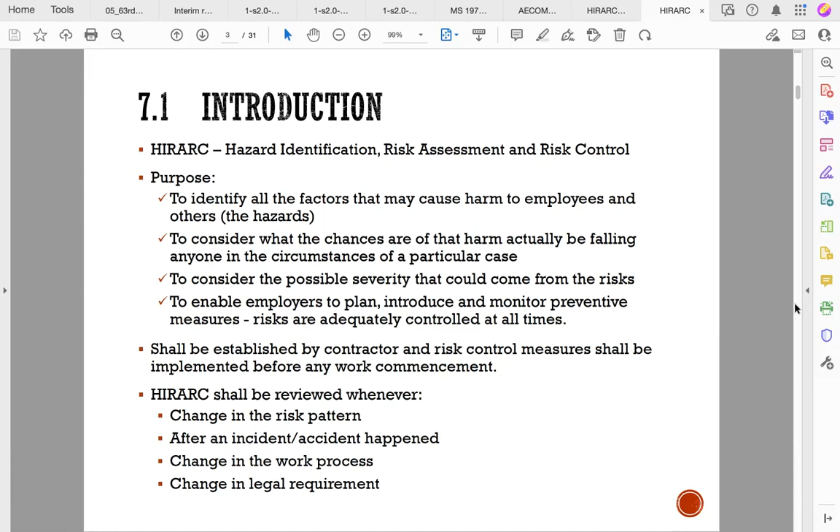So this is the one you just mentioned, about hazard classification. They have the physical hazard - what is the physical hazard here? Hazard that can cause harm. For example, what is physical, biological, chemical, ergonomic? Any kind of hazard related to this classification can harm these three things: human, environment, and property, which is considered a hazard. Other than that, there's psychological, workplace, electrical, and mechanical.

Let me show you the classification in details. I think this one is clear to show you. Let me share this one. Can everyone see it?

Hello? I'm worried if it's not changing to the right one. Sources of hazard, Doctor. Sources. Yes, correct. So I want to give you an understanding of what is the hazard based on this classification.

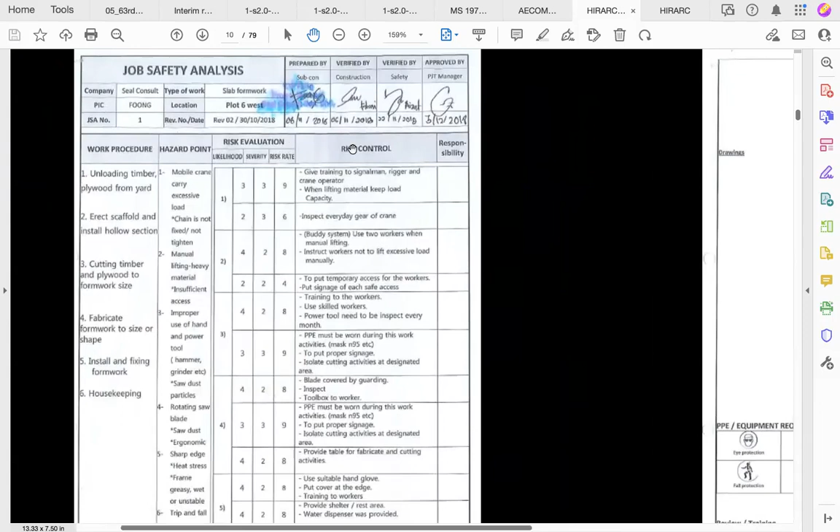Okay, and these are examples that they are doing. If you look here, they already identified the hazard. Can you see it? Hold on. Okay, can you see it? So here they say hazard, and then risk evaluation, and then risk control. So these are examples from UEM construction.

Doctor, why is the form title job safety analysis? Okay, like I said, it depends on the practice of the project. Some notify this as JSA, and they also have the method statement, safety method statement, method procedure and so on. But actually this job safety analysis, of course you have to analyze the work because it's related to the work activity.

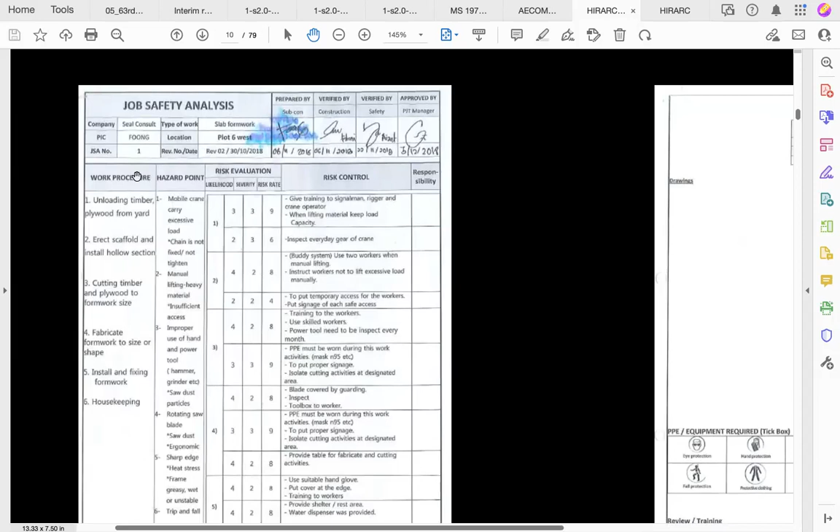So whatever job is conducted at the construction site, you must identify the risk. That's why they consider this also part of the JSA. It depends on the company, they call the HIRARC to be conducted under JSA. And some companies, as long as they do this analysis, which is already done as part of their job, at least they do the preventive control, preventive measure already.

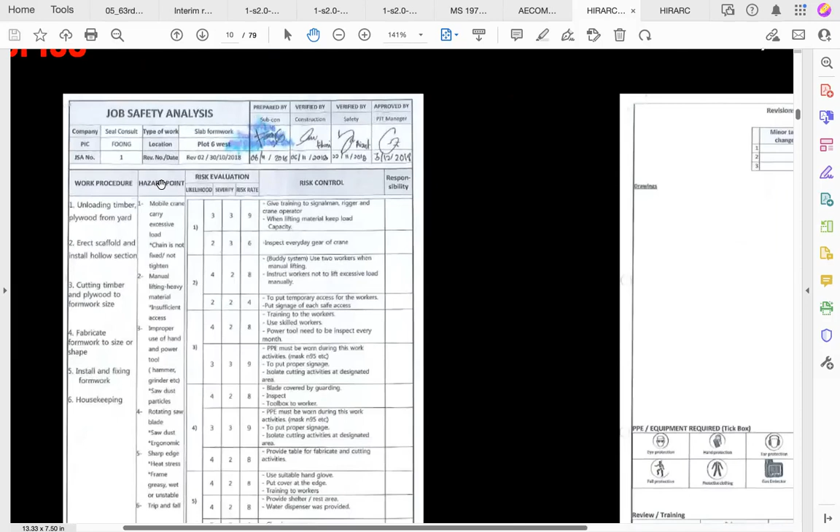Before they start the work, when they call it JSA, of course they can use this term because the activity you do to analyze is to identify the risk, to evaluate the risk analysis and so on. It's clear, okay. And this is also a common practice. Every construction project says, okay, can you do the JSA? Usually the content of JSA comes up with the HIRARC.

And then they have a working permit. Have you heard about the permit to work? PW, POW, or PTW, permit to work? So PTW, have you heard about it? When do you use the PTW, permit to work? Before I start the work.

Okay, now it's already JSA here. You said before you start the work you implement the PTW. Why aren't they calling this form a PTW? This one is also before the work. Why do they call it JSA? PTW, when do you want to use the PTW, permit to work?

There's another term you have to know. The reason is PW is more detailed for specific work, like we have PTW for excavation, for lifting. Why do they use this process? There's a reason when you want to use a PTW.

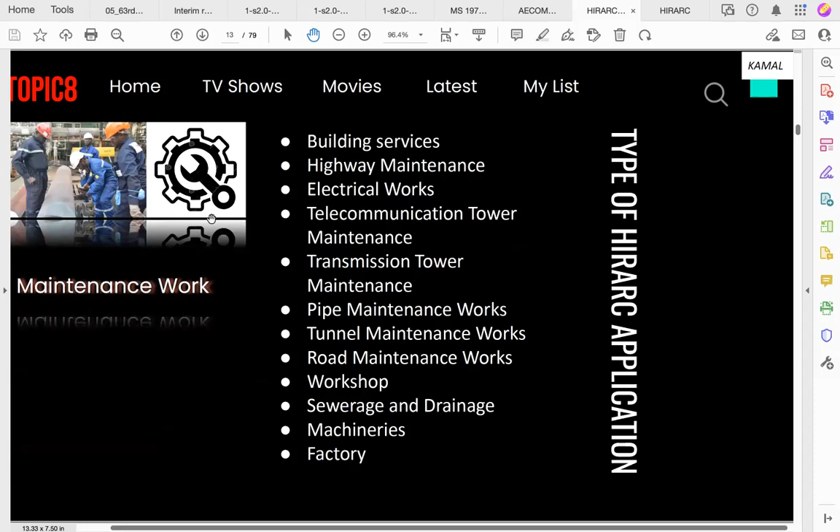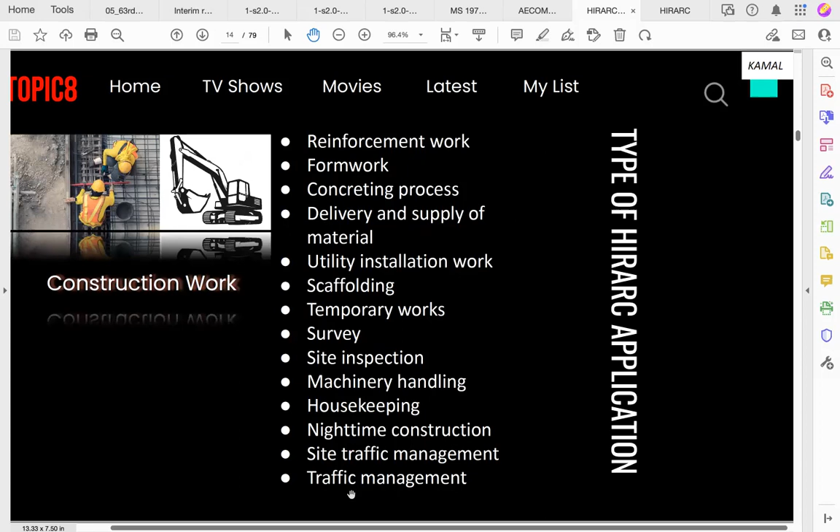Building service, highway maintenance, every activity - those who need to comply with OSHA need to do this HIRARC, and there are many works related to these activities. If it's construction works, you see how many works here? A lot, right? And there's more - oil and gas, depends on the industry. If it's landfill, this kind of work, they also have to do HIRARC.

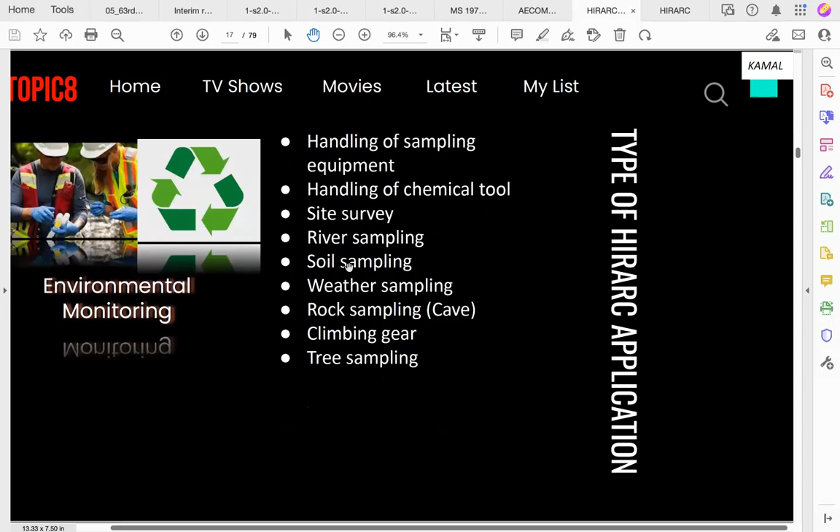Environmental monitoring, okay, all right, so they have the guideline you can see here for HIRARC. That's why we refer to HIRARC, because they also have the guideline, the common practice. So when they have this guideline, it means HIRARC is being practiced in many industries, those that comply with OSHA, not only the construction industry.

And again, like your friend said, it depends on the practice, so don't be stuck with just the term HIRARC, don't be surprised if you hear other terms. So this is why we need HIRARC - because it's part of the safety management.

And then there's the Construction Activity Risk Assessment, they call it CARA. They use their own terms as they like - so they have these terms as well.

So what happens is, under this practice, under this standard, they also say that they have to identify the hazard and analyze the associated risk, because it's in the act, in the regulation, in OSHA. So no matter what activities, especially CIDB - which is specific for the construction industry - they want to make sure that the performance of construction companies in Malaysia practices safety. So they have their own standard, coming up with the same things, whatever complies with the regulation.

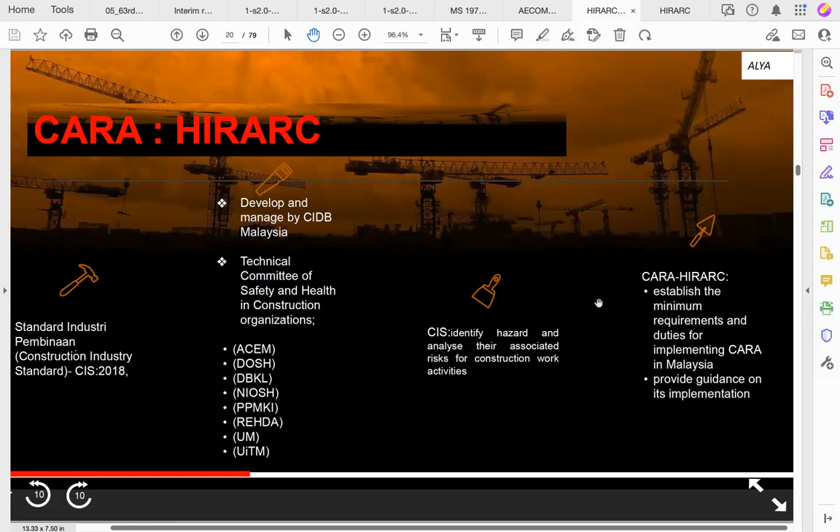So they ask them to do this as well - establish the minimum requirement duty for implementing CARA. This is under CIS, and then provide guidance on its implementation. So these are the activities under this standard dimension - these are the crucial or common practice activities at the site.

Okay, site preparation activities have sub activities that you might have to analyze and come up with the HIRARC. So they come up with these 9 main activities at the construction project, and you have to come up with this HIRARC.

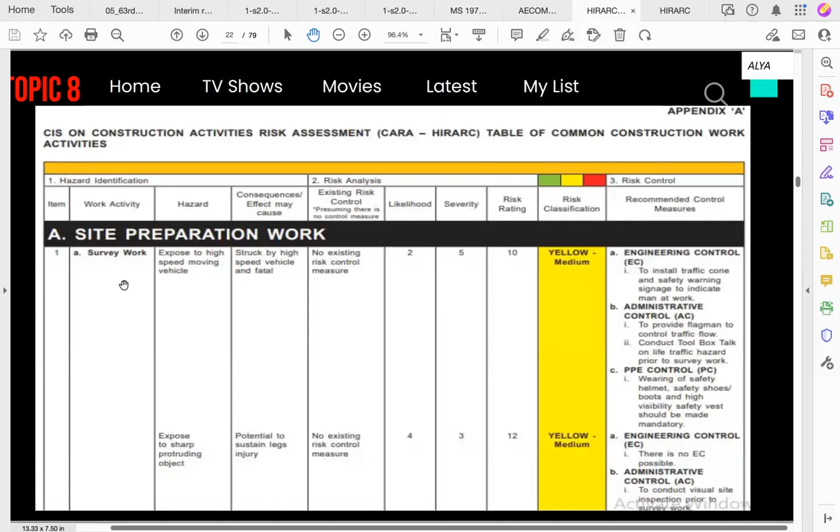These are examples of site preparation work. What do they have? Survey work. Is there any risk? If they say yellow, that means medium. And they have site access preparation. When they say high, why is site access preparation high risk? Maybe the site is at the hill, or at the ocean, or anywhere else. So it depends on the location wise. Some site access preparation maybe is not high risk, some yes.

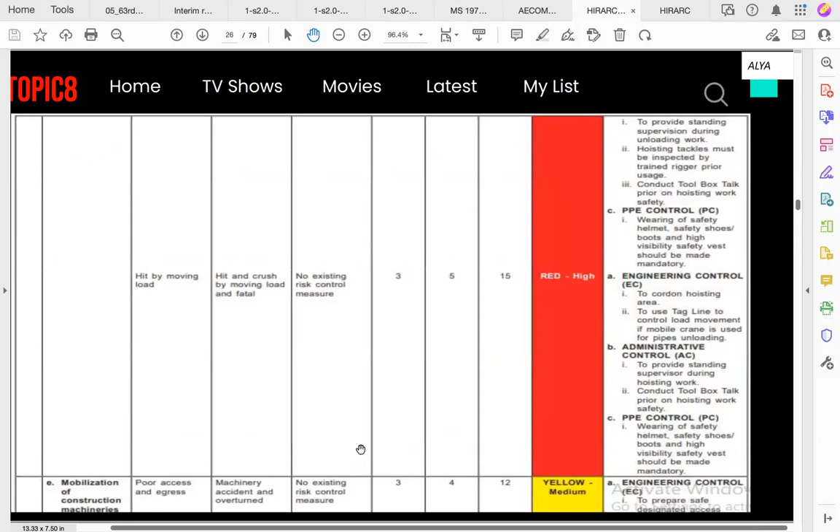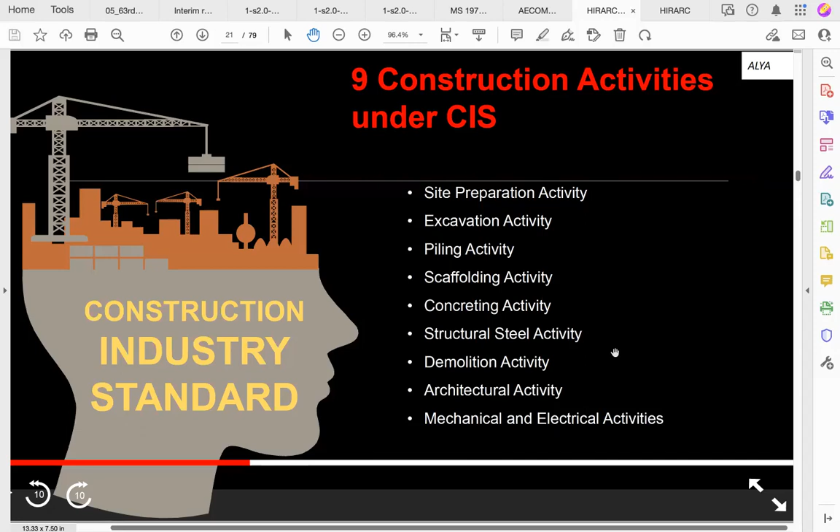Site clearing - so it depends on the project. The one you can refer to, for example, like these 9 activities here, the safety officer can get a reference for this one. They can copy this one, but the sub activities will differ, and the analysis might be different as well.

What time is now? I hope that by 9 I can brief you about the project. This is the purpose and objective of - I already mentioned this one, right?

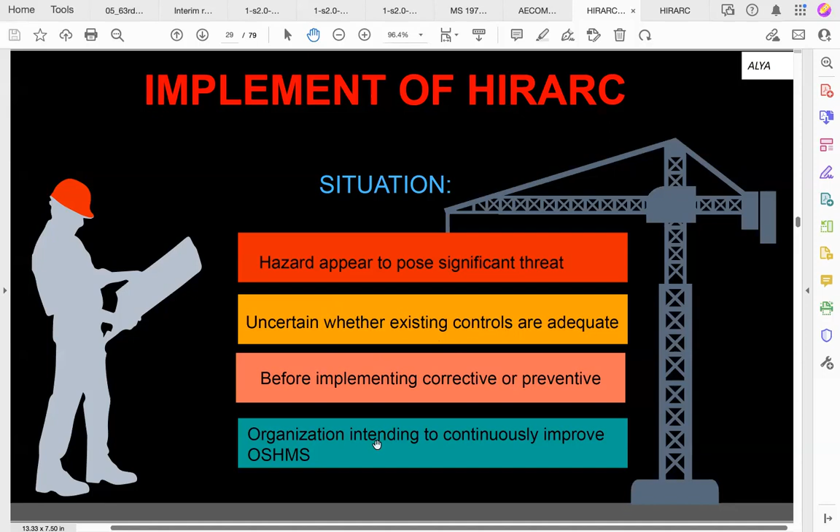The situation, you see, has it appeared to pose a significant threat? Uncertain whether existing controls are adequate, how to implement, and before implementing the corrective and preventive actions, the organization is intending to continuously improve.

So for the implementation, how to start, of course you need the employees' participation, because they are the ones who have to carry on the work. So no matter how, you have to deal with them. And then it depends on the specific organization policy, how much they want to consider as high risk, medium, and low, and how they want to calculate the risk analysis, the assessment.

And then they need to implement because of the external audit, but without external audit also you have to conduct it. And then management committee review report, internal audit, commitment of management, organization should have a vision, safety basic training. So this is how you want to start implementation, and then this is the HIRARC process.

So you can see, like I said, you must classify the work. In the standard from the CIDB, they already mentioned about the 9 activities. It could be more, it depends on the safety officer, how they want to evaluate and so on to do the HIRARC. So it could be more than 9 parts.

And then for this one, you have to identify risk analysis, implement, review. It's common - later I'll show how to calculate. Hazard identification - these types of hazards, there's more.

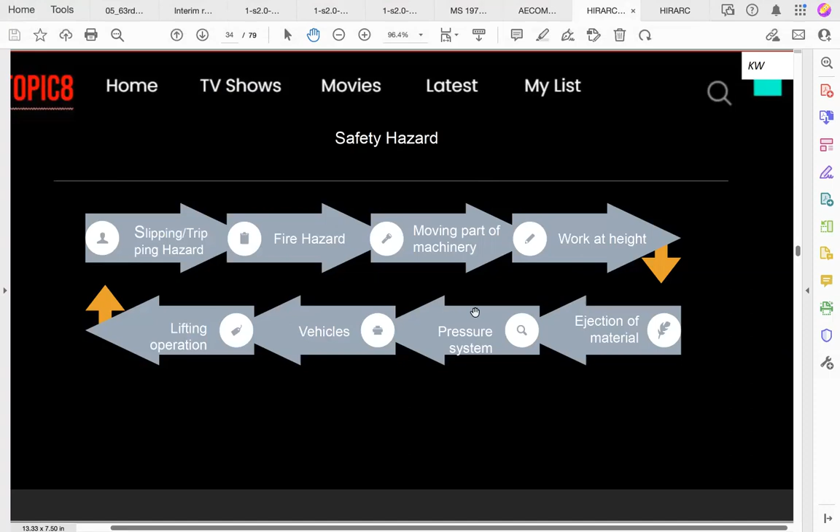This is a safety hazard, environmental hazard. Alright, how do you want to identify the hazard?

I gave you the slide, it's moving, right? Now it's about hazard identification technique. No? Yes, it's moving, Doctor.

So to identify the hazard, actually there is a technique. For example, if you are still new and want to identify the hazard, it's not easy for you. So you must base it on the record, complaints, health and safety documents.

Maybe reference and so on, the inspection, maybe from interviews with the workers themselves, from observation. So these are the techniques in order for you to identify the hazard. It's not simply by thinking - you must see it on site in real. Then you will see the technique.

Hello, can everyone hear it? Yes, can, can, Doctor. I don't know what happened, I heard some signal. Okay.

And then hazard identification assessment - the steps and time frame of identifying a hazard and keeping a record of the hazard, reviewing and monitoring. So this is what you have to do. And the technique, like I said just now, there are a few techniques. It doesn't matter, as long as you cover all the activities at the site, it will be fine.

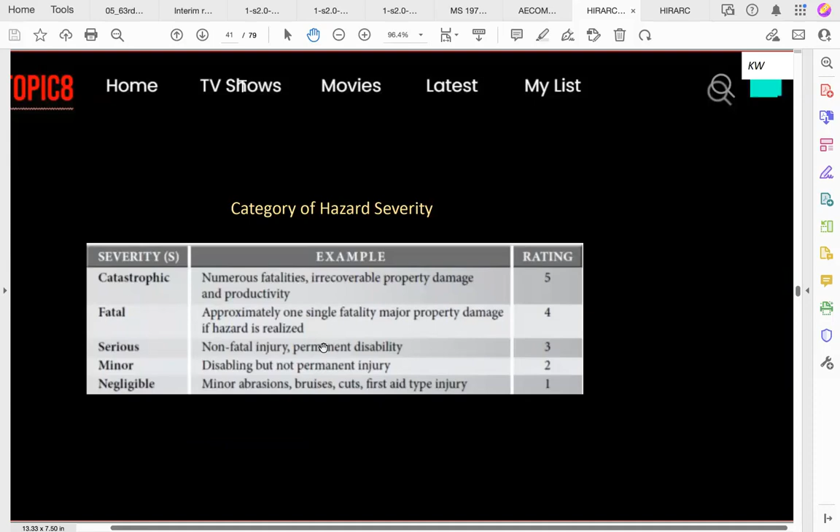So for the same thing, it depends on how you want to evaluate, it also depends on the condition. It could be 5 if the wire is, for example, in contact with water, so everyone can get in touch with it, so it can become a catastrophe. So it depends on how you want to evaluate, depends on the condition on that side.

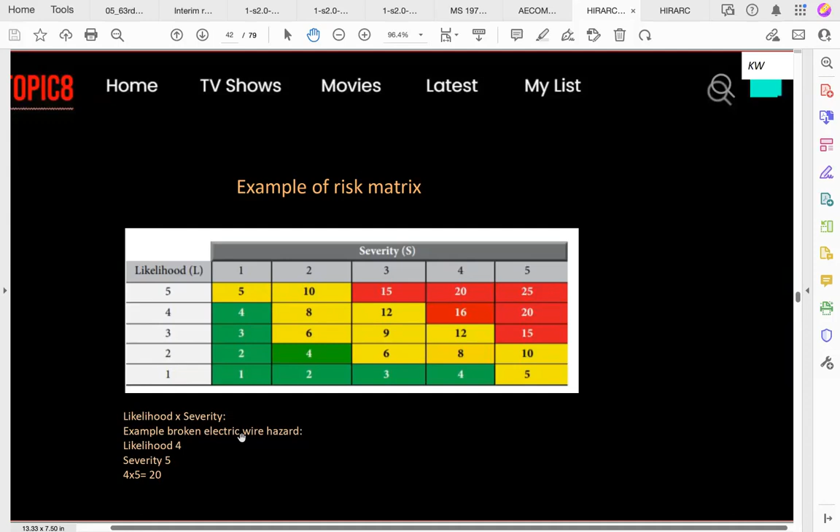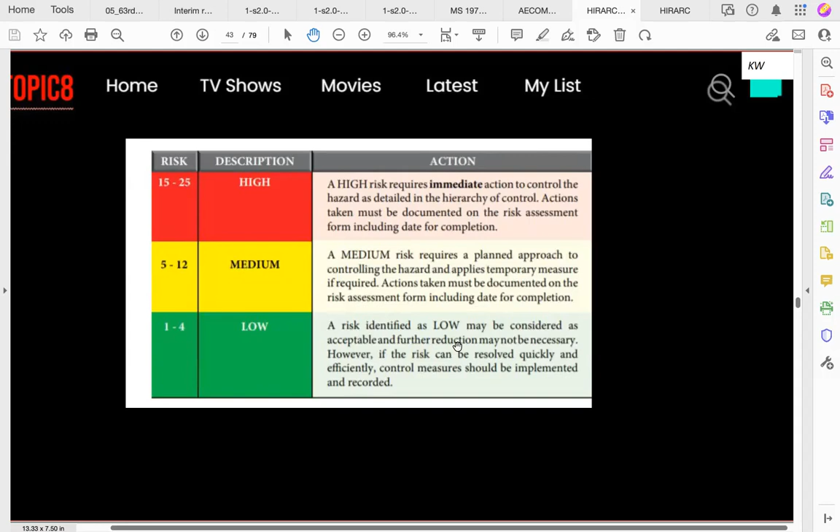Okay, all right, so is it clear, do you understand how to analyze? This is the description for low risk, medium risk, and high risk. They said that if high risk, usually you have to get immediate action control, and if medium you need to plan, and low maybe they just consider it okay, still manageable, so they don't need to control it. Okay, so hazard control, how do you want to control it?

Okay, I want to show you another slide. Maybe in my slides, this one. How to control, class? Can you see the screen? Yes, doctor. Okay, what is on the screen now?

Hierarchy of control. Just now I already showed you how to identify the hazard, what is the classification, and recently, how to analyze the risk, where you need to consider likelihood and severity. Then you get the figure and the class of risk - is it low, medium, or high? So now you need to control.

So the moment you want to control, you have to consider this hierarchy, which starts from elimination, substitution, engineering controls, administrative control, and PPE.

Some hierarchy of control have 6 levels, some have 5. So it's up to the safety and health officer, which one they prefer - it depends on their management. If they use 6, some hierarchies mention isolation - you know isolation, they isolate, separate. So sometimes they have first eliminate, isolate, substitute, engineering. Here I show you the 5. So don't be surprised if they have 6.

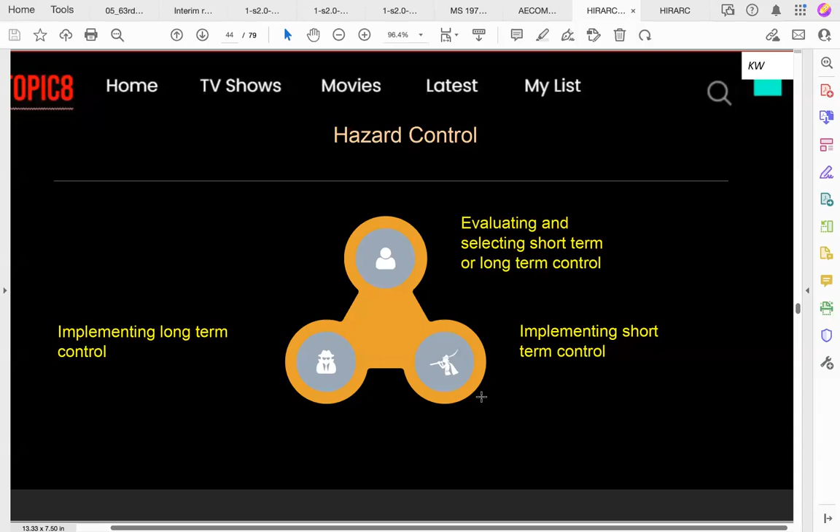So this one I already mentioned here, same things. Okay, then to document the HIRARC, like I said, this is the process. You have to complete the whole table of the HIRARC form. So it should be fine.

Hello, can anyone hear me? Because my AirPod is running out of battery. Can everyone hear me? Doctor, can you hear? Oh okay, now I can hear from the speaker. You can, okay alright.

So I want to be quick. Okay, there is another checklist. What is this checklist? It's just a checklist, the word... example, this one in Malay.

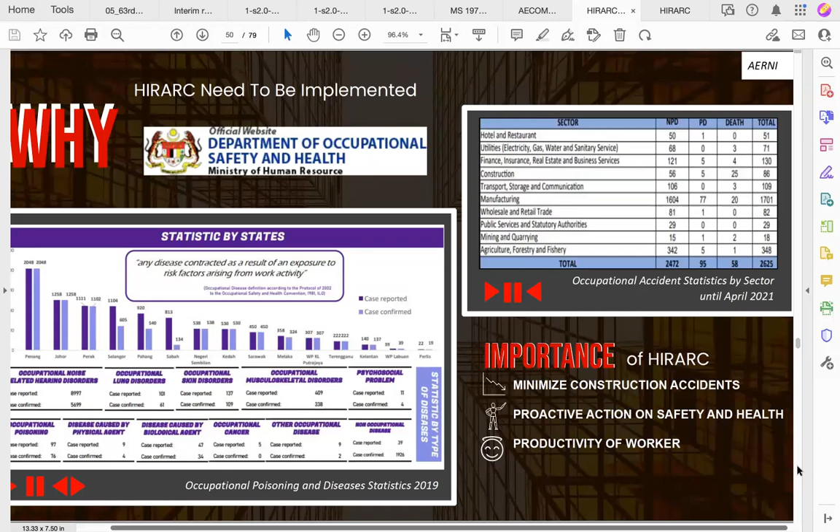So the importance of HIRARC, they said it minimizes the construction accident. Yes, at least you try to control the hazard. You can minimize it, it's not that you can make it zero accident, but the risk is still there, so usually you can minimize it. And they consider it a proactive action for safety and health, and productivity of the workers can be improved because you already control the hazard, so it can reduce the risk to the workers, and they can feel safe working at the site.

Okay so who needs to implement? Employer, workers, everyone actually, and especially the contractor. Okay, and then this is the case study.

So I think this group mentioned about the MRT project. Okay, I think we don't have this one, it's just like a case study. And so of course this one also, Farah, are you involved, right? Because you're under Gamuda, so you're involved with the MRT, I think, safety project, right Farah?

Yes, so this one is they have what the HIRARC methodology, you see, it's the same thing. It just like they have another - there's the likelihood, the severity actually, the analysis. This is how they have the HIRARC methodology. Looks different but actually similar, just like the way they explain this thing, the method they are using.

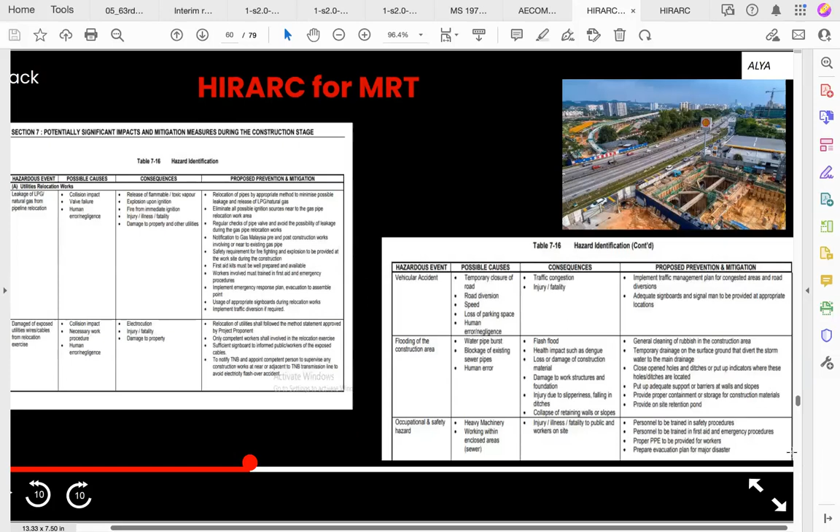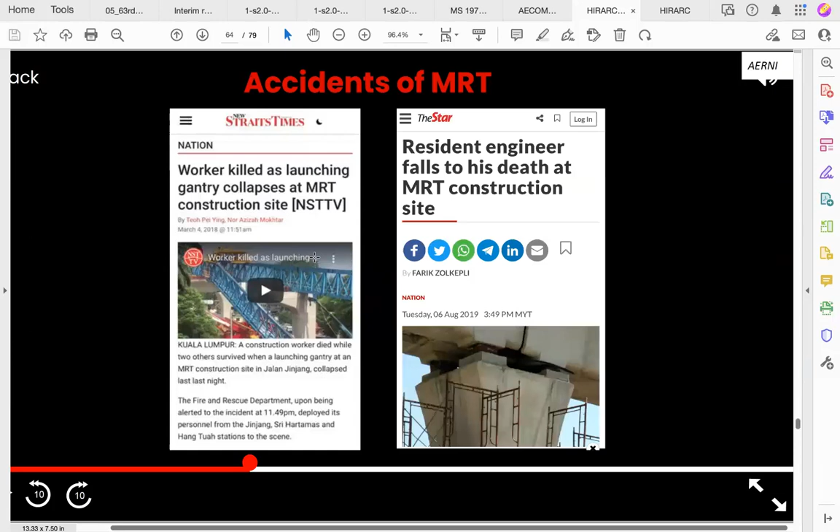Okay, so these are the list of hazard identification, see they mentioned the proposed prevention, even detailed out like a report. So they have to refer - what is the incident here? Worker killed as launching gantry, and so on, a lot. So still, once this incident happens, they have to go back to their HIRARC document, then we see what happened with this incident.

Okay, implementation - the common issue is lack of effort from the stakeholders, client, especially client. They don't care as long as the contractor just does their job. If the client, for example like an infrastructure project, this one the train, the MRT, the client is who? Prasarana, okay MRT Corp, sorry, MRT Corp, right?

So if the MRT Corp have the commitment on the safety, of course the contractor who is Gamuda, for example, they will follow, or they have commitment. Okay, sometimes the contractor has more safety commitment rather than the client. So it depends who's in charge.

And then this one, insufficient safety aspect, they said common issue - incomplete submission of HIRARC which for approval, there is no... sometimes they take it easy, and this is because it's already done many times, and it's just like for the documentation. But if you have the documentation but you don't practice it on site, for example you already analyze and do the HIRARC for working at high open space, and then you mentioned the risk control to fit the safety net.

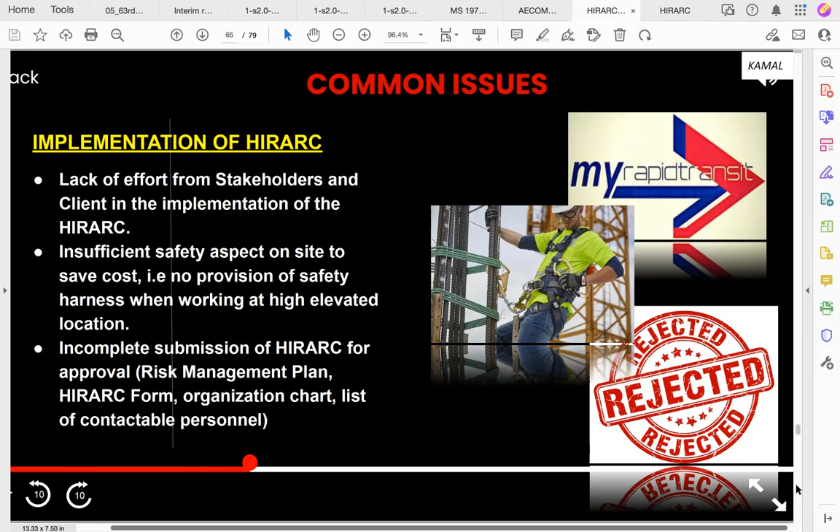For example you mentioned safety net, but on site you didn't do that. So is it implemented, whatever you already assessed? Is it okay to do like that? You already mentioned it on the paper, but on site you didn't practice it - is it okay? It doesn't work, so it must be implemented. Whatever you already planned, just make it happen on site. If you already showed it on paper but you didn't practice it, it doesn't work. They must implement - once you carry out, you have to implement whatever you propose.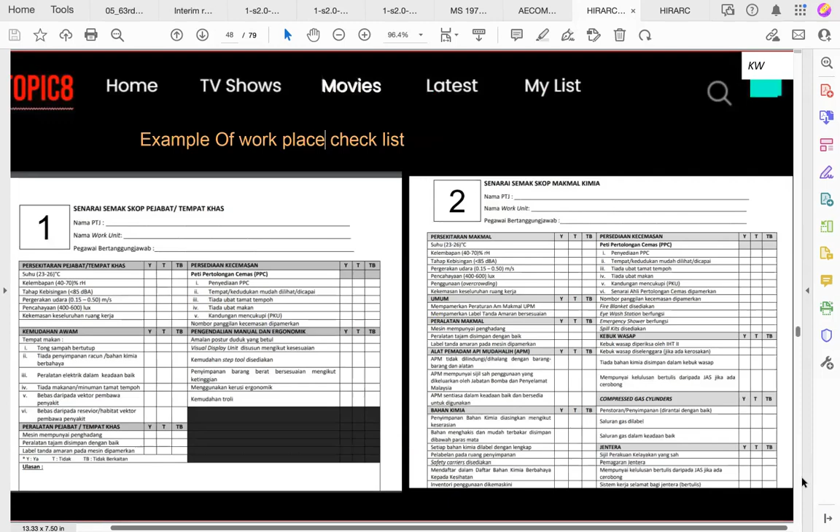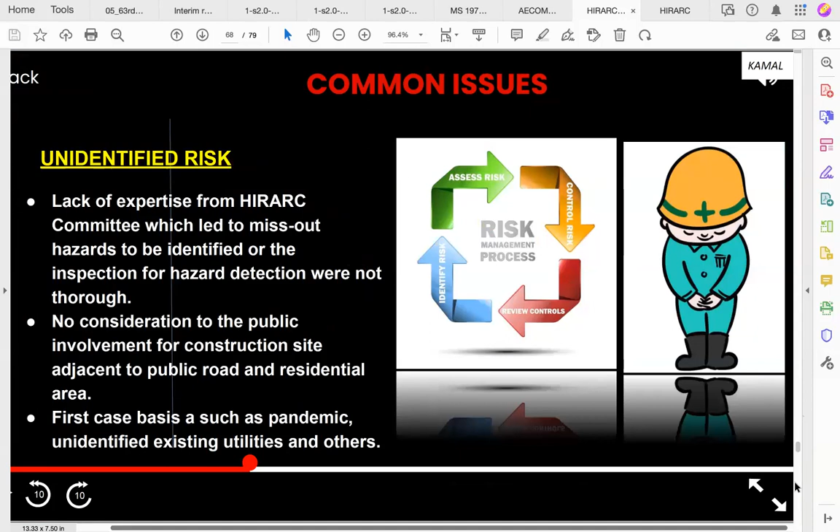Okay, what else? This one we already covered, why they go up. Unidentified - there is a common issue, sometimes you didn't see the risk, that's why I said risk hazard, you need to be experienced. So the solution: promote involving stakeholders, provide better HIRARC identification needs, experience system, and systematic enforcement as well.

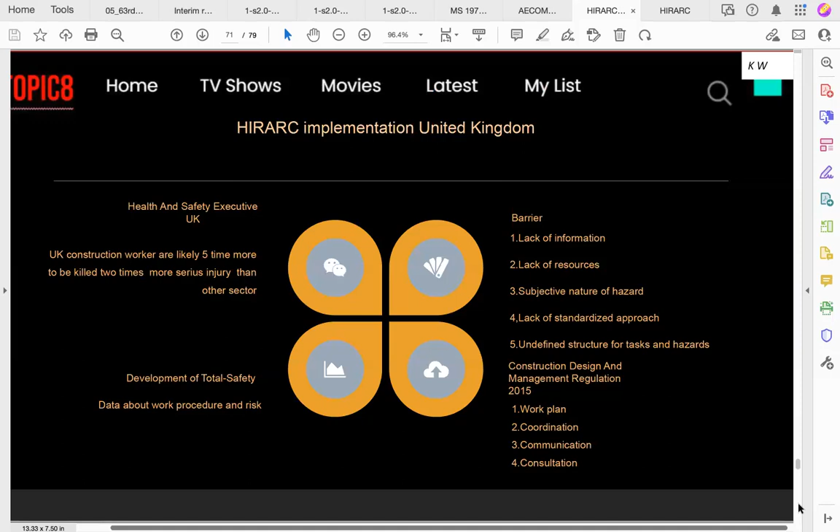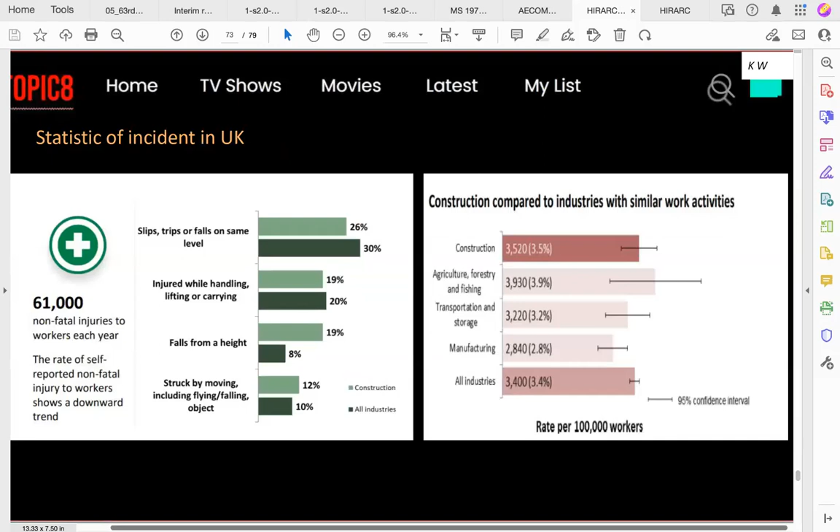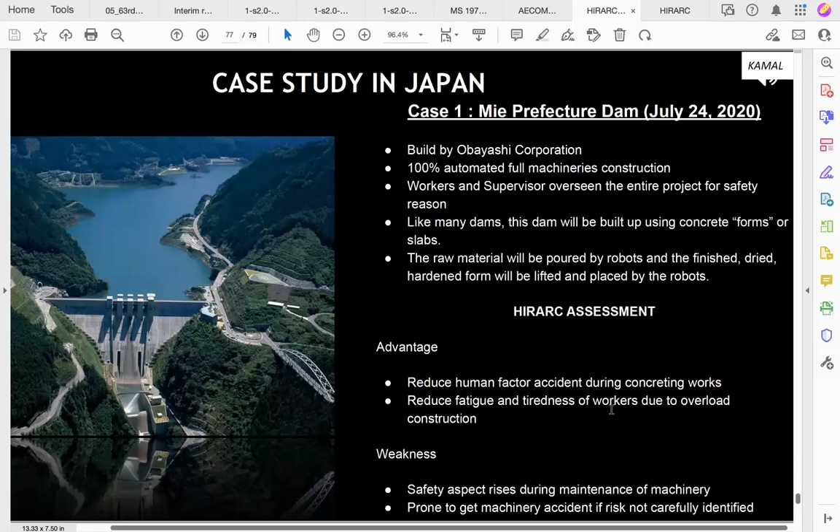Okay, this one they mentioned about HIRARC implementation in the UK, there is an example, you can Google also, go to the website HSE, you will see the statistics I think. This one in Japan also, they use HIRARC, it became mandatory law. So they said what, ODA, JICA, this one - so the same thing, same purpose as well. This one is for the case study for this project, so they said they have to reduce the risk.

I forgot what video they showed. Okay, so that's all about the HIRARC. I hope everyone is clear.

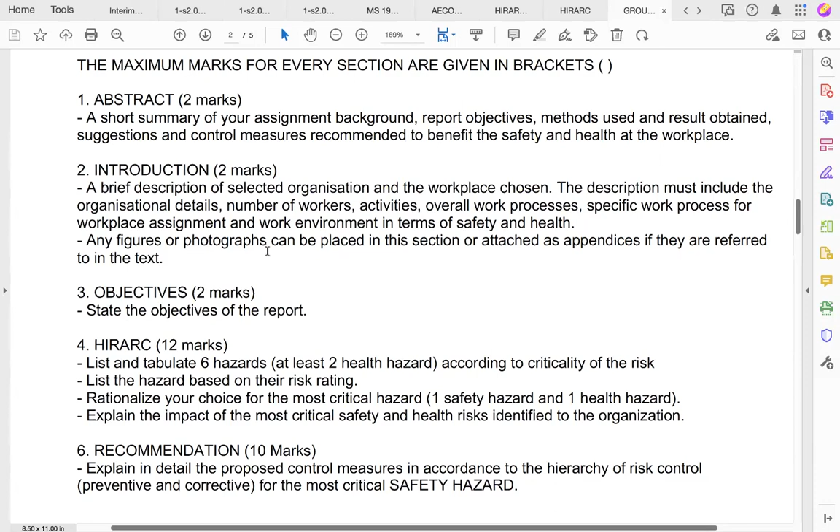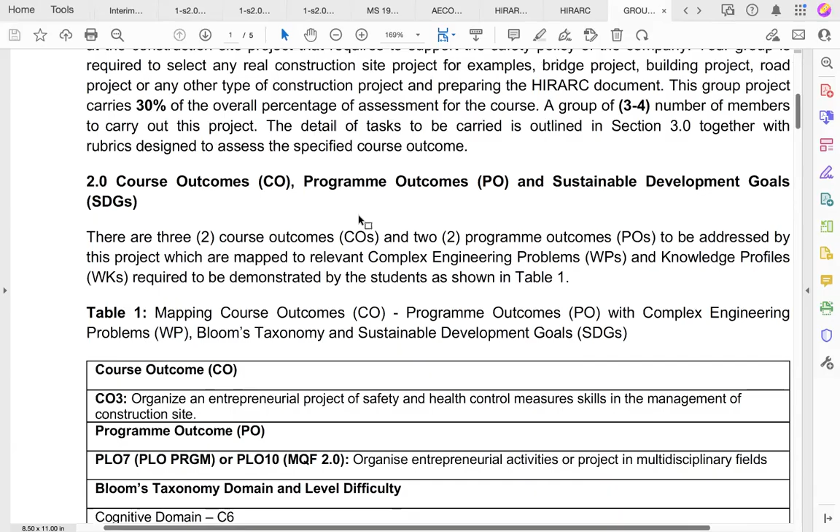And then you have to have the figure and photo and so on attached in the report as well. And then come up with the objective - state the objective of the report, what is the purpose you come up with the report. You can go back with the introduction here, but specific to your work - the one that you're preparing. Come up with your own objective for your report.

And then the HIRARC - like Shafiq asked, does it need a table like the example? Yes, you have to list and tabulate 6 hazards in the same template table, listing all the hazards and the risk rating, and what is the approach, the control that you already proposed based on the high risk. You have to propose - choose the high risk one, one safety hazard, one health hazard.

Go step by step how you want to propose it, and then explain the detail of the proposed control in accordance with the hierarchy of risk control preventive measures, for the health hazard and for the safety hazard as well. And then the reference list of the references that you're using - these are the formats that you have to come up with for the example of the reference.

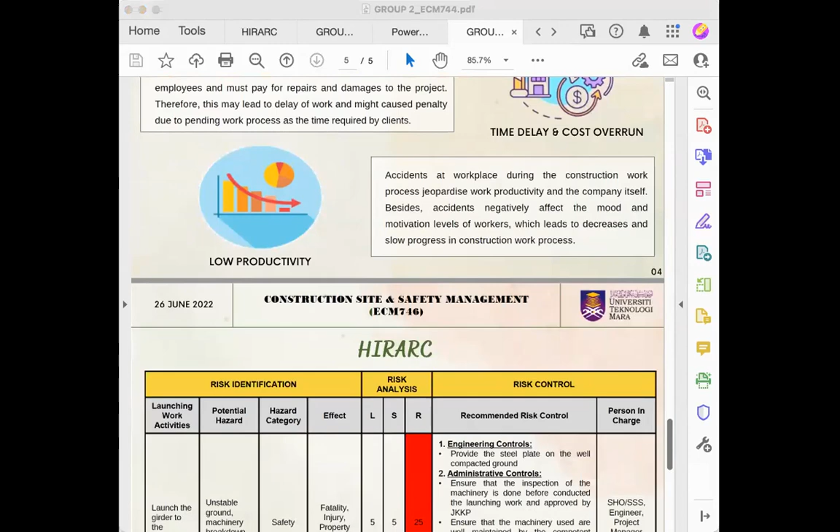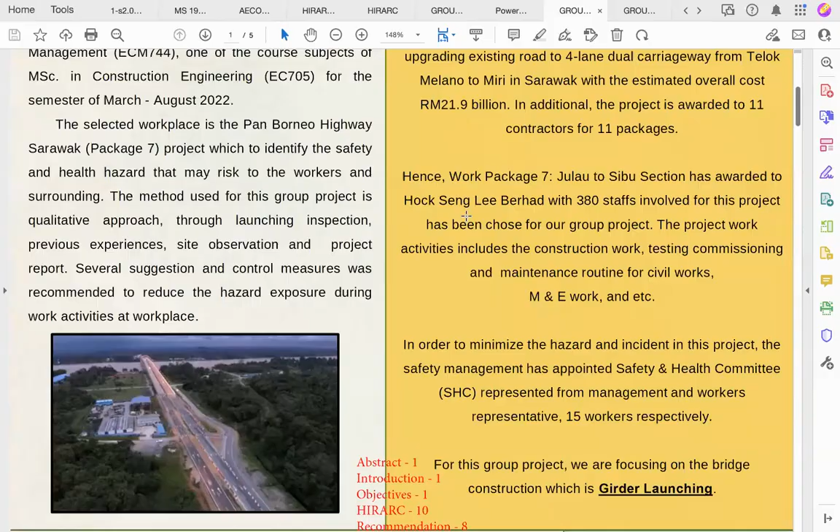Okay, I give you example. Can you see it? Hello, can you see it, Doctor? Yes, some got it. Some of them come up with, I deduct the mark.

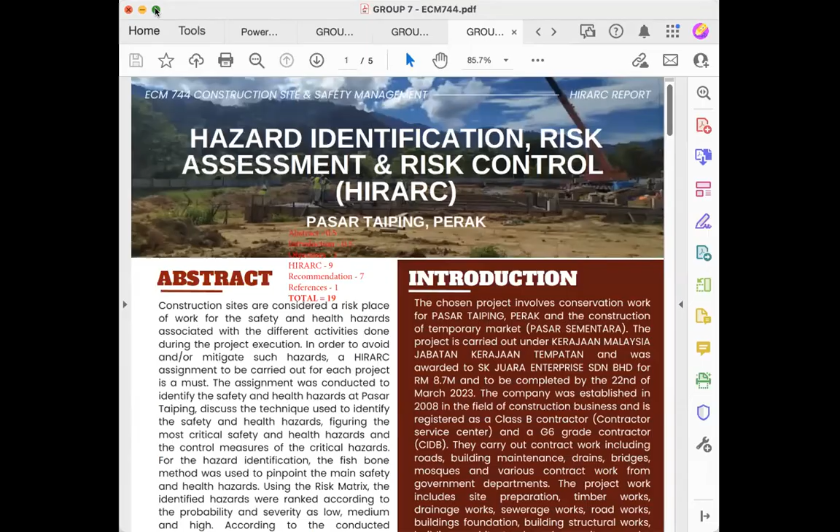Okay, example, see? Can you see it? Okay wait, I prefer portrait, don't make it landscape like this. I prefer portrait, so this one you see 8 pages. I don't want, just make it 5. How you solve it, how? Okay, some group can make it, why you cannot? You see, it can be done right?

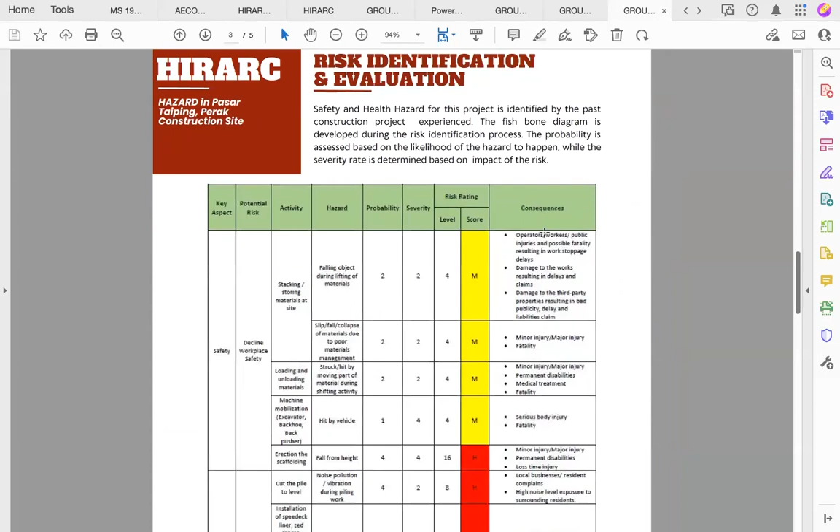Example, can you see it? This is a technique. This you have to, once you already evaluate 6, that one, okay, 6 means that 2 health hazard and 4 safety hazard.

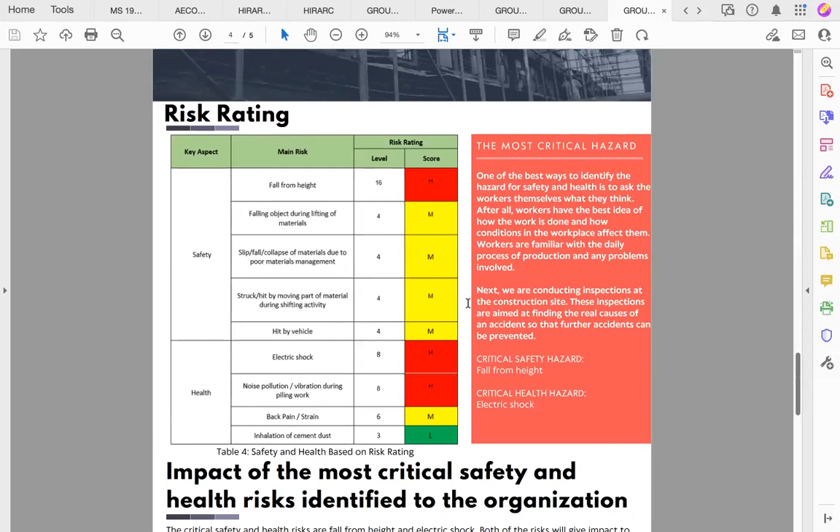And you have to evaluate the risk, then you come up with the high risk here. You just select one high risk for safety, one high risk for health. Then you come up with the proposal, this one, the most high risk one, what you have to control or prevent.

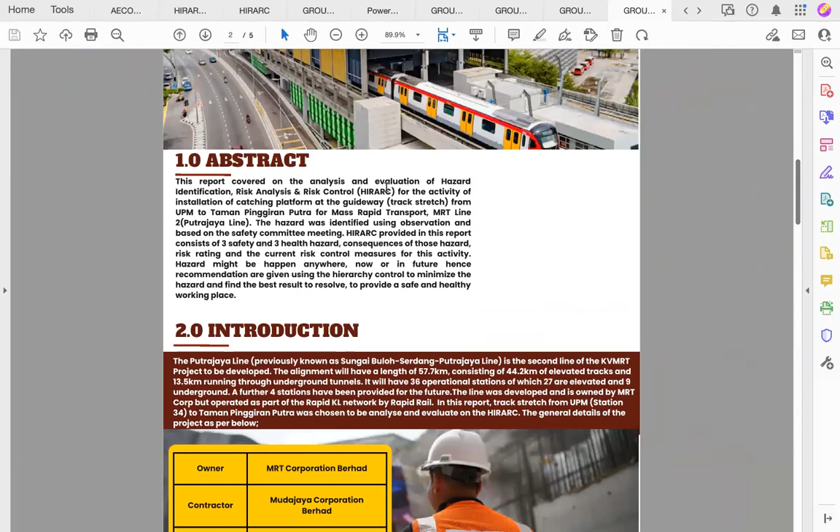Okay wait, let me show you other groups, also 5 pages right? You see this one, 5 pages. Can you see it? Class, yes, are you okay? This is the objective, you see? This is how they come out. Enough right? Enough.

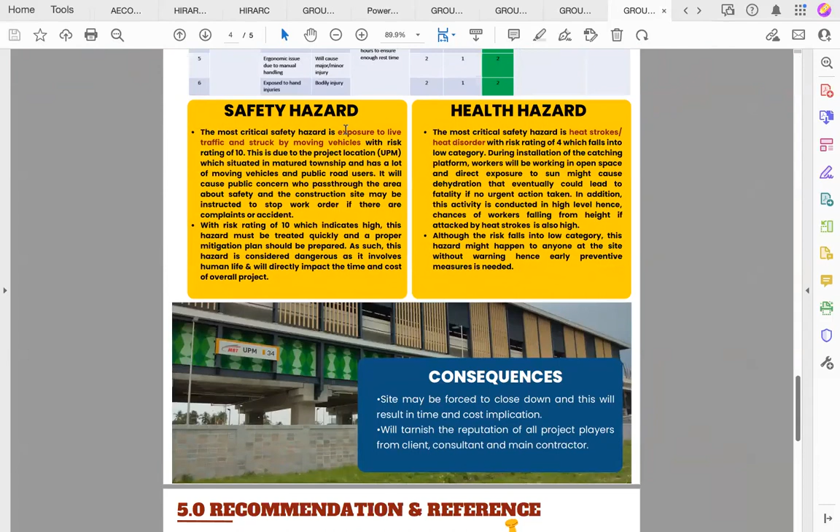This is, they found out that safety hazard, the health hazard, heat stroke. Look, there's another example already. So it depends on your project, whatever that you found out, then how they propose.

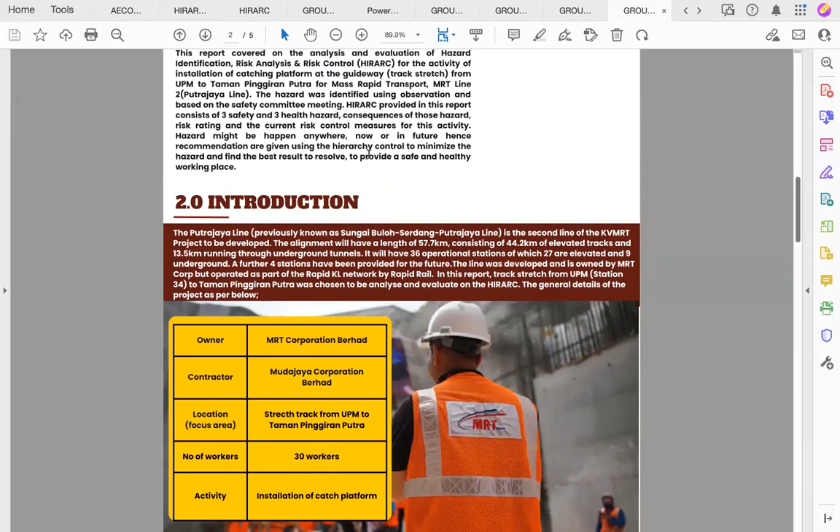Okay, it depends how you want to come up with it, but as long as you answer all the assignment list, okay, but this is a rubric, you can refer to the rubric as well.

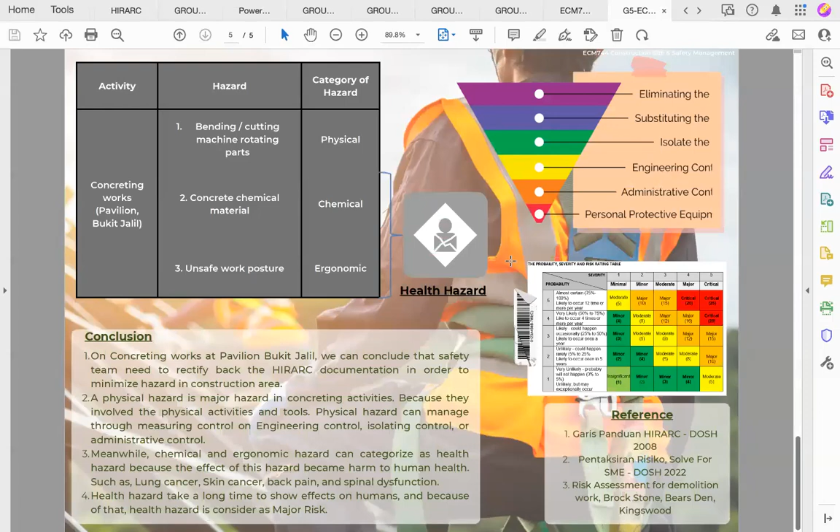This one I just captured, see. So you must have this one also, you must have the risk matrix, how you want to categorize.

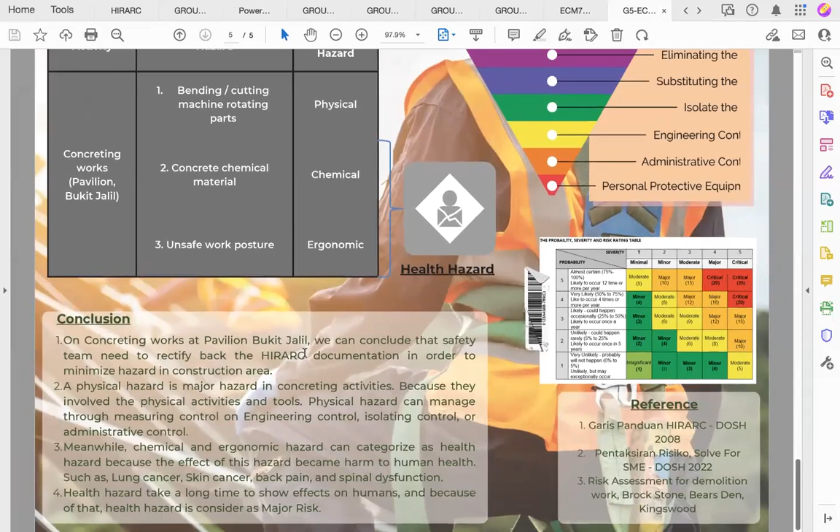The risk matrix depends on what you indicate. Okay, because you can come up with any kind of risk matrix, but if you follow the guideline from DOSH it's okay, but I will refer to whatever you prepare. Some of you may be worded differently, the statement is different, which is more clear or what, so it depends because you are the one who prepared that report. So the report must be based on your practice, not other people's practice.

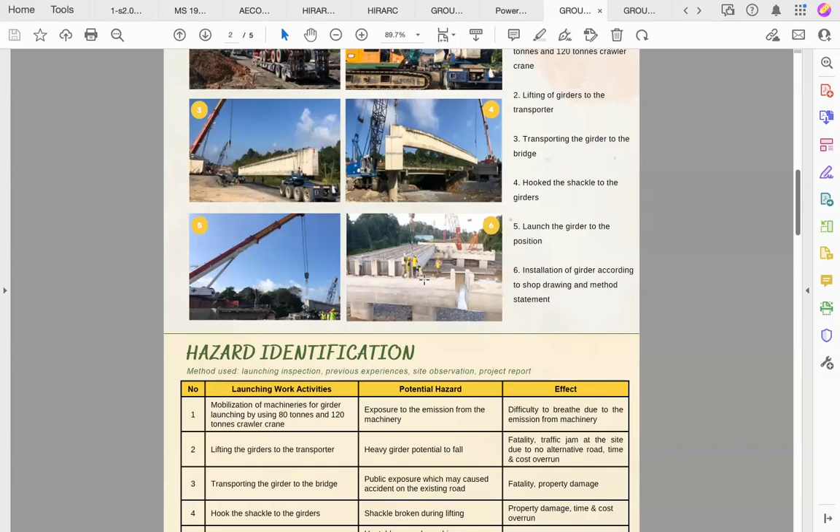This one is nice, they talk about the work progress, work activities, girder launching. I like this kind of different example. If you can find a unique activity that is very high risk, please perform it in your report, which is a different presentation of your report. So this kind of activity is special. Girder launching is high risk, right?

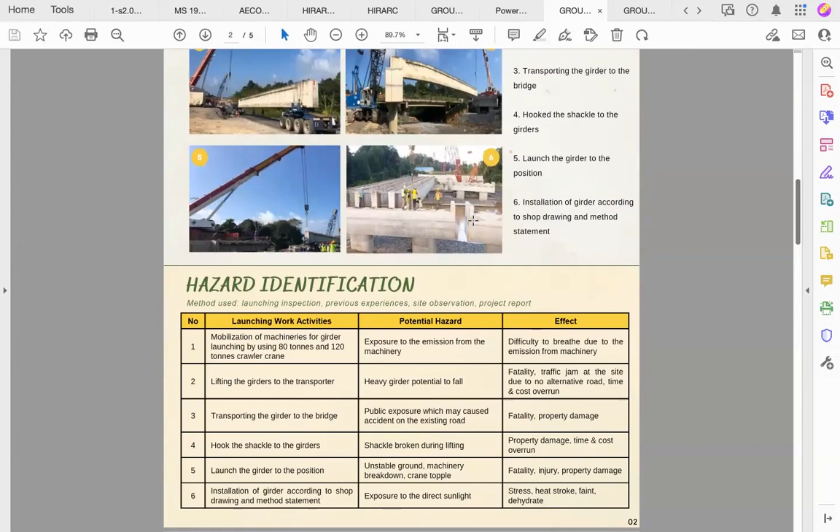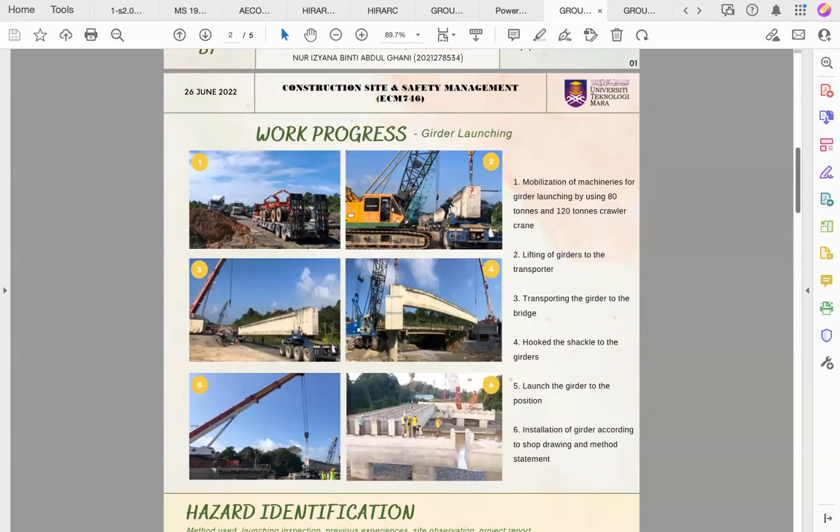Okay, so think about the based on, please understand why you choose this work progress. Usually you will identify based on that work activity only, the potential hazard for that work activity. Don't let your seniors come out with wrong examples. Nasib baik I ingat nak remind you.

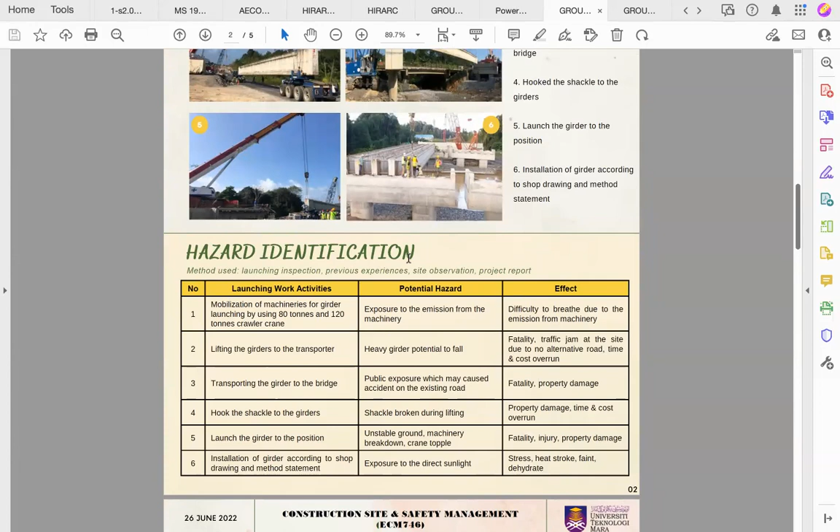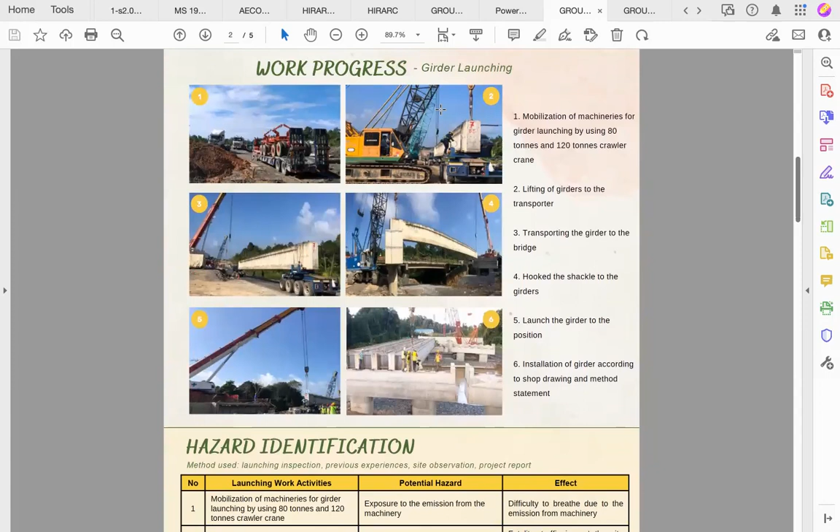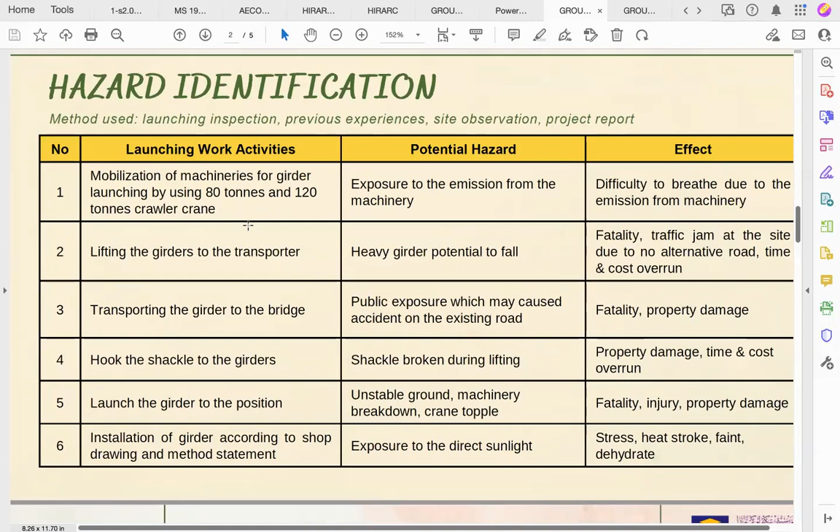Tadi ada 6 kan, right? 6 hazards that you have to perform, that you have to do the HIRARC for. Yang 6 hazards tu, 4 from safety, 2 from health, is based on one selection of the work activity. Okay, because there is the work activity, work yang dia select, dia akan ada the activities ni. So you must relate the work activities ni. What is the hazard? Nampak tak contoh ni? Can you get the idea? So from there you akan list out based on the work activities tu.

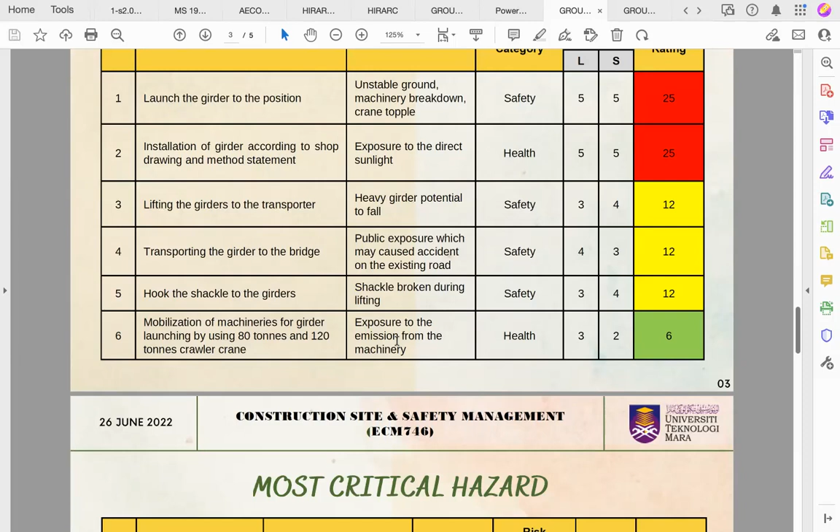Okay, then you will identify, this one can be exposed to direct sunlight, so it's health something. This one can be exposed to emission, but it's nothing, you see? So this is based on the work scope too. Don't do many activities and come up with different ones.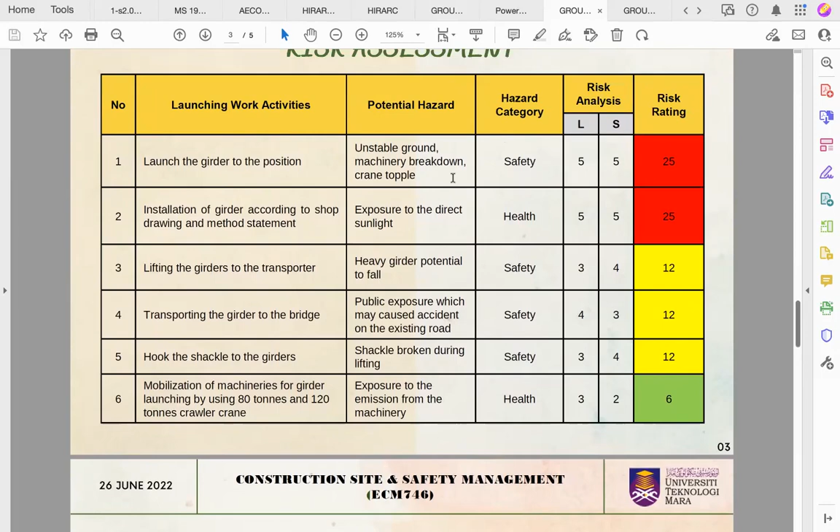For example, you come up with the safety hazard for the lubang, you said excavation, and then the excavation there is a step, how you want to dig, how you want to do the activities. So there's the risk in the activities. Okay, so please make it clear, and only choose that activity's hazard.

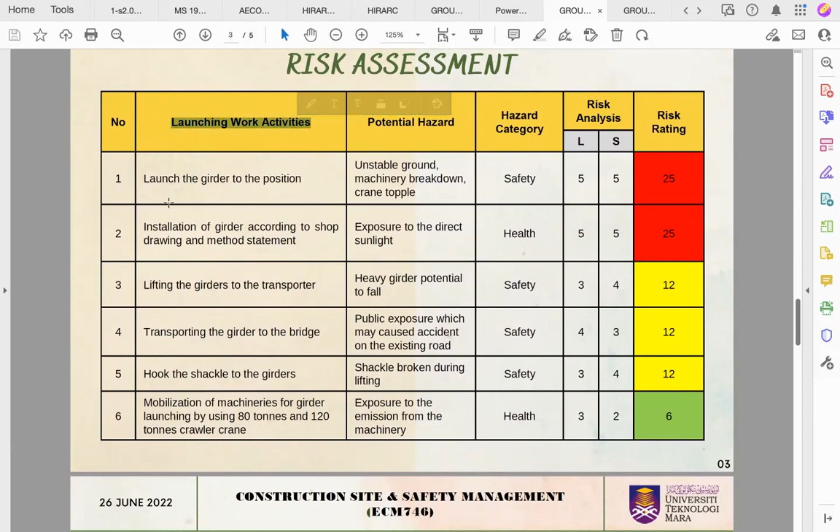Faham tak? Girder launching work, choose that activity specific. So if you choose excavation as the work activity, make it clear what kind of excavation. Maybe here you just mention general, but then when you want to clarify, you have to describe, okay, how deep is it? Excavation with 10 meters versus excavation with 1 meter, which one is more high risk?

So please be clear, faham? Understand? So I've shown you this example. Kalau salah juga I don't know lah, I'll deduct marks.

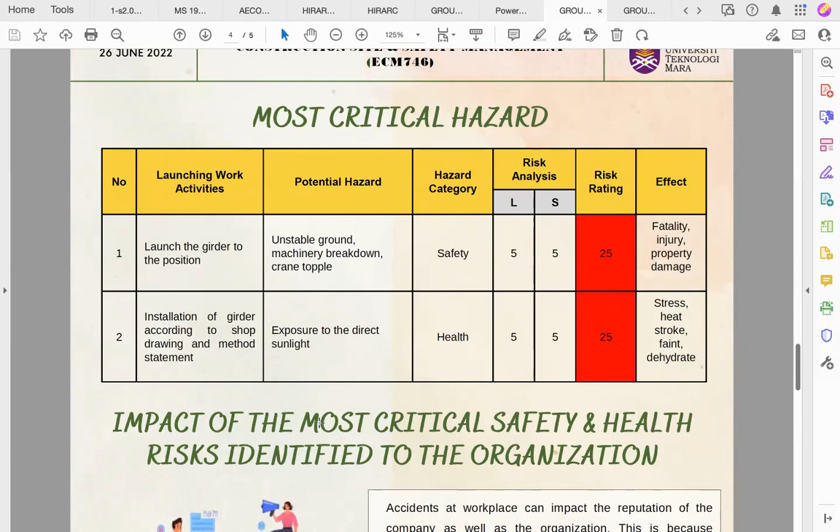Hello, any questions? No doctor, loud and clear, because I see the example and it's clear.

Okay, clear? Okay, no more questions.

Doctor, this one only report, not going to be a presentation, right? Sorry, this one we only produce the report, yeah, then no need to present. No presentation. Your presentation is already the group presentation, that one is done.

That one is 30%, so this one is 30%, so these two works, two assignments, is 60%. Where is the site visit report, already submitted in the U-Future? Huh? Not yet, not yet.

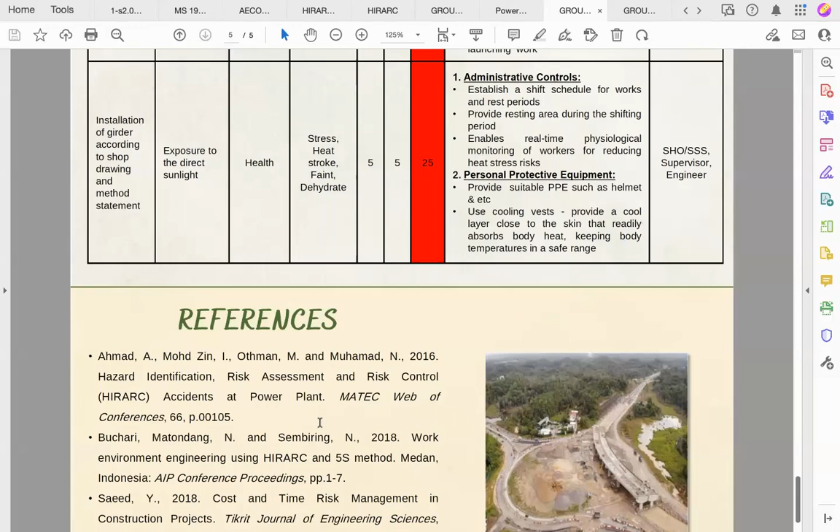Gracias, any questions? Can you give me your full names? Any more questions?

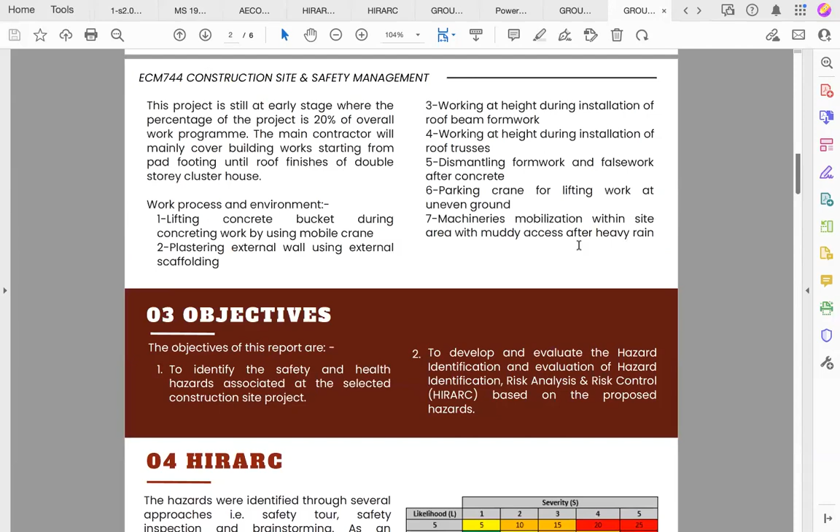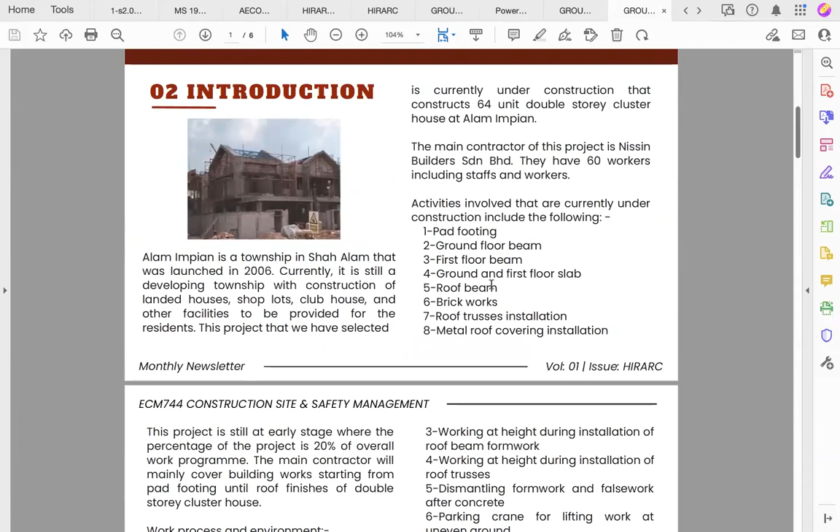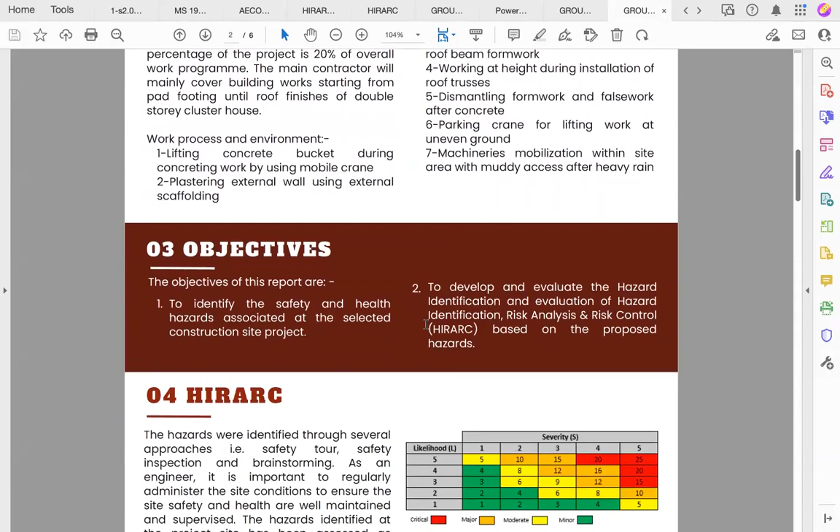They make it like a process. This one they include work process and environment. This one they make it a lot of activities, which is I'm not prefer like this. The one that I prefer should be like this, so please pay attention, okay?

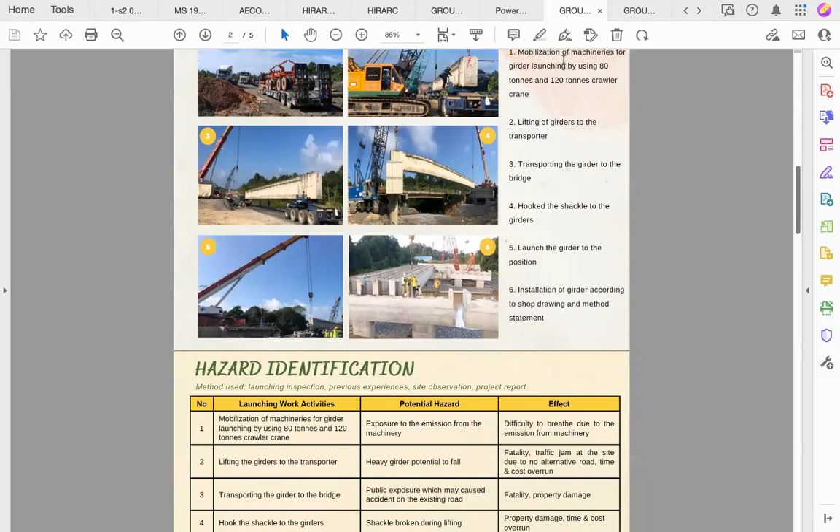Okay, so no more questions. So everyone clear? So please read again the one that I already showed you, it's in the U-Future.

You can find that file. Okay, wait, I updated the deadline. Remember, the deadline is 18 June, right?

Let me share this one. Hey, where is it? Oh, here, okay, the deadline. Oh, how can I use this? Okay, this one, edit. Okay, I want to change this one, the letters. Okay, so when is the deadline?

No extension. Once you fail to make it on time, there will be no marks. I have to be strict.

Can the site visit report be extended? Next week? Why next week? It's just a simple one, it's okay. Submit it by Saturday, just for our record so you have proof. When they ask where's the physical copy, here is the report, that's what they want to ask.